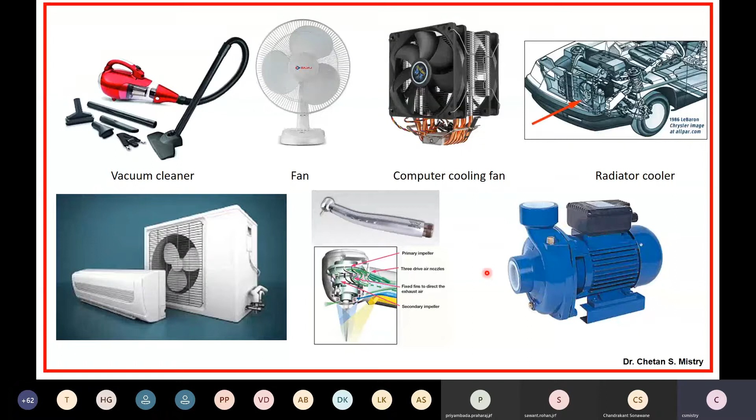Okay, let me move it. Suppose if I am talking in terms of power plants, we have cooling towers. In order to have this cooling, you need to have a big size fan. If you look at that, it's nothing but an application of turbo machines.

If you look at, there are few flow meters known as turbine flow meters, that's what is being used for the measurement of mass flow rate for various liquids as well as gases. You have big size centrifugal compressors, that's having some purpose in terms of transportation, some purpose in terms of high pressure requirement.

We have gas turbine power plants, that's nothing but land based power plants. We have steam turbine power plants, we have hydro turbines. If you start searching for what are the applications of turbo machines, you will find them everywhere. Even if you start with a very small device, that is also made up of turbo machines.

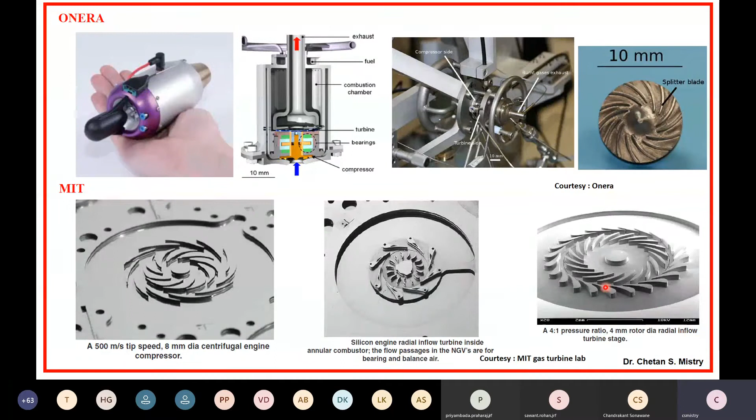People also talk in terms of space applications. There also we have pumps as well as turbines. That's a special application for propulsion, giving very high amount of thrust required for transportation purposes.

We also have renewable sources of energy - tidal turbines, wind turbines. So when you wake up in the morning and start thinking, let me have turbo machines as my device, you will find everywhere all these devices are made up of turbo machines.

Now that's the whole scope of turbo machinery. Let's try to understand what exactly turbo machines are. It is any energy transferred to or from a continuous flowing fluid - that's what is continuously flowing - by the dynamic action of one or more moving blades.

So turbo machines have been classified based on function. Power absorbing device - maybe required for rising of pressure, or rising of head in terms of a pump. So compressors and pumps are power absorbing devices.

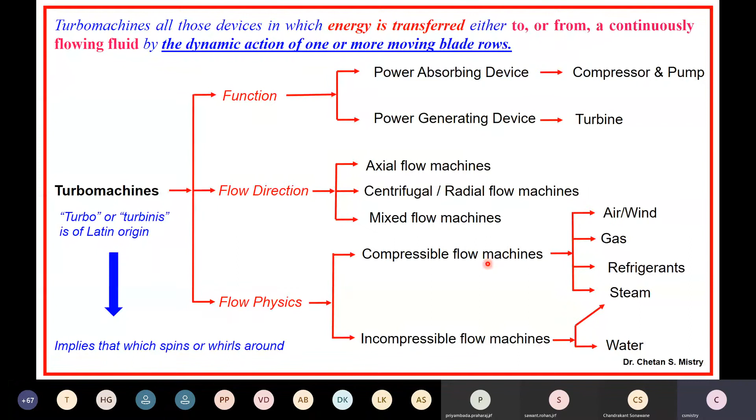Now if I continue talking in terms of turbo machines, it needs days. For the main application of CFD, let me share - in the 70s people started using CFD analysis. They started using CFD for analyzing fluid flow, mainly for aerospace application, mainly for gas turbine engines. Slowly maturity came with the technology, and now people started using this for some other applications too, but CFD in turbo machinery has mainly been applied to aero engines.

So let's see what we understand in terms of engines. We have two kinds of engines - air breathing engine, non-air breathing engine. This classification is very general. I can have jet engine, in which I can have ramjet engine, scramjet engine, pulse jet engine, gas turbine engine, turbo ramjet, rocket jet engine. But major concern is with gas turbine engines.

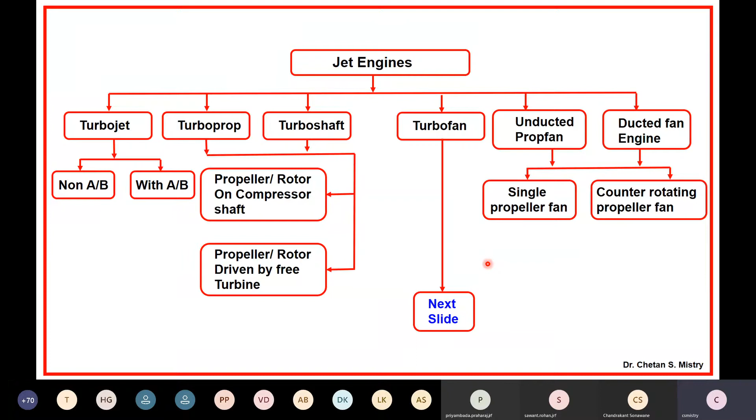So if you look at it, it's again classified - maybe turbojet engine, turboprop engine, turbo shaft engine, maybe turbofan engine. We can have unducted turbofan, ducted turbofan engine. This turbofan engine is further classified into so many things. So you can understand the requirement of gas turbine engines.

And all these devices, if you look at, are prefixed by turbo - meaning it's a turbine or turbo device, used for gas turbine applications. So in my whole presentation, I will try to incorporate maximum devices used for engines, gas turbine engines. I will discuss a few applications for other purposes also, but my major focus will be on these devices.

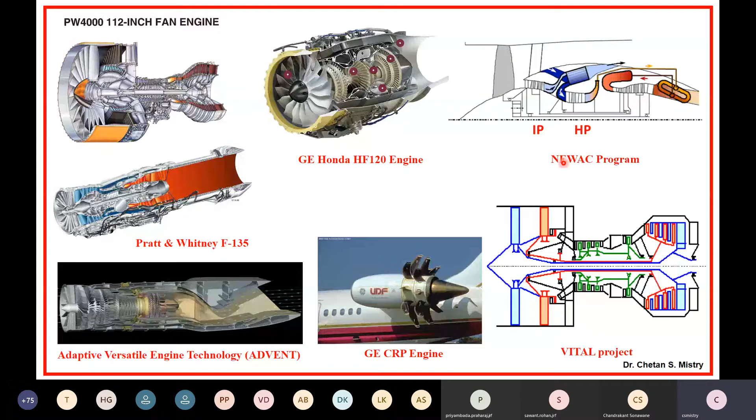Let me start with what I was showing, the high bypass ratio turbofan engine. Here we have a big size fan, which is an axial fan. Here somewhere I have the intermediate pressure compressor. This is the HP compressor, which is run by the HP turbine. So there are two spools placed inside. My HP turbine spool rotates my HP compressor. This is the LP turbine, which rotates my LP compressor.

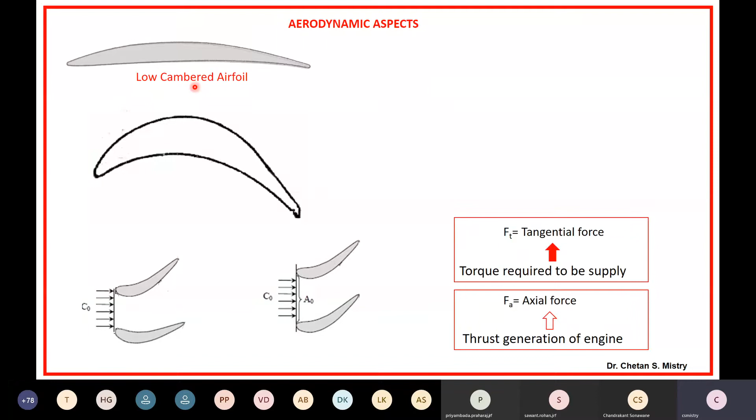So as I told, we are having an aerodynamic device, that aerodynamic device I can say is an aerofoil. So here if you look, this is what we say as a low cambered aerofoil, because my turning or bending, this delta beta, is low. If you look at the second one, that's what is called a highly cambered aerofoil. Now these two both have special application.

What is the purpose of my aerofoil? It is to generate the lift. If you ask any aerodynamicist, if you ask someone who is working in fluid mechanics, he will say the whole purpose of this is to generate the lift. Now, when I say it is to generate the lift, then you will say, sir, then why are we using this in turbo machines? We need to take benefit of this lift.

So I say, if I look at this aerofoil, that's what is generating lift as well as drag. So lift is of my requirement.

Here if you look, I'm having a passage, one of the cut sections in which my inlet area is lower, my outlet area is greater. Same way, other configuration, if you are looking, I'm having my inlet area to be higher, my exit area to be lower. So we can say this passage is called a diffusing passage, and this one, which looks like a nozzle, is called a converging passage. Now this is what we say is one of the devices.

Here we have the direction of rotation for both compressor and turbine. My compressor blade rotates, and this upper surface is what we call the suction surface, while this lower surface is the pressure surface. So this is my suction surface, this is my pressure surface.

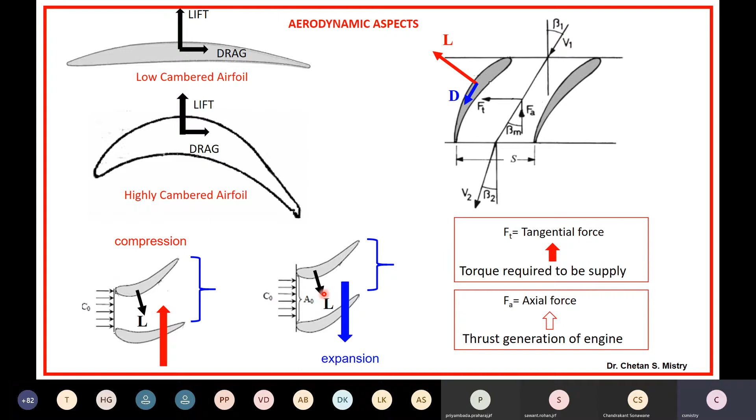Similarly, for expansion or turbine, I am also having my lifting force. Here I am utilizing this lifting force to accelerate my flow, which is my requirement for the turbine. So this is the whole purpose of what we call aerofoils.

Now let's try to understand what is happening, and what is the purpose of an aerofoil. The purpose of the aerofoil is to generate lift, and we use that lift force for compressing our air or gas. So here I have my suction surface and my pressure surface.

This represents my velocity distribution on the pressure and suction surfaces. On the suction surface, initially the flow accelerates, and then it gets decelerated. Similarly, near the pressure surface, the flow accelerates up to a certain distance, and then it gets decelerated. This represents the distribution of velocity change along the chord.

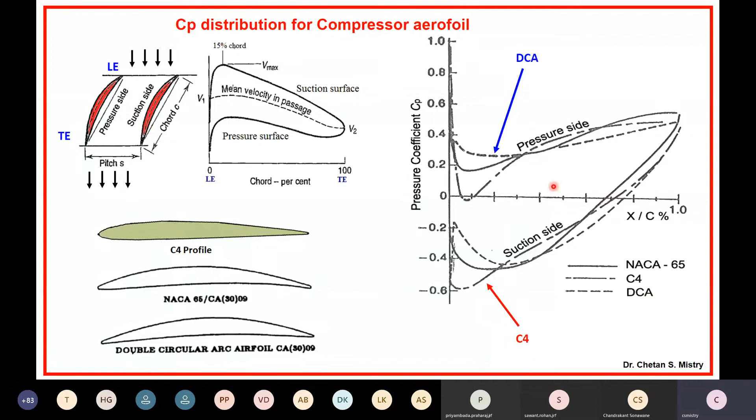Now let's look at what is happening with the aerofoil. I won't spend much time on the velocity triangle, but let me say this is the blade angle beta 1. My flow is entering axially, and this is my rotational direction, so that represents my beta 1.

Same way, this is the exit of my rotor, coming out with blade angle beta 2, and this is my stator. So this is my velocity triangle at some location. Now with change of mass flow rate - which is nothing but density into area into velocity...

You need to understand, if I'm reducing my mass flow rate, and my density is not changing and my area within the passage is constant, then my axial velocity is decreasing. My rotational speed is same, so my beta angle will be changed. Reverse case, if I'm increasing my mass flow rate, my axial velocity is increasing, so my beta angle will be changing. In terms, this is called incidence increase and incidence decrease. Similarly, at the exit, that angle is deviation increase and deviation decrease.

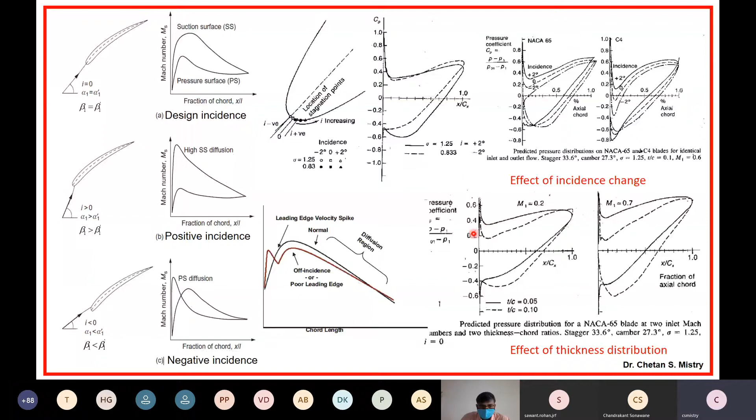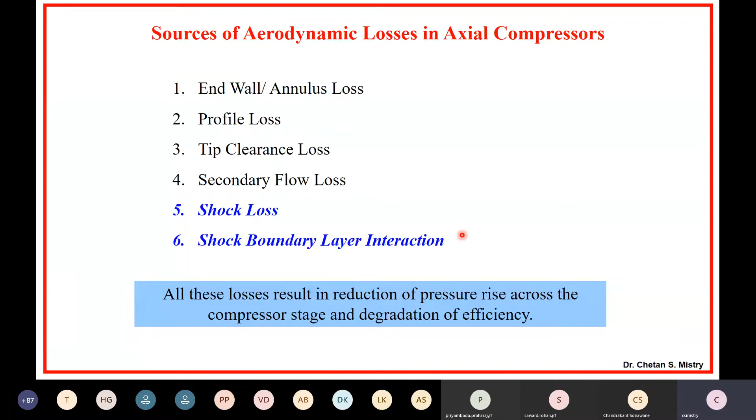Suppose if I say in terms of end wall losses, what we know is whenever I have a solid body and fluid is flowing over it, because of viscous effect, we will be having growth of boundary layer. If you consider a compressor as a device, that's enclosed inside the casing, and casing is a solid body, so along the length, my boundary layer will be growing downstream. Same way, if I consider my blade, that blade is also a solid body, so it will be subjected to growth of boundary layer because of viscous effect.

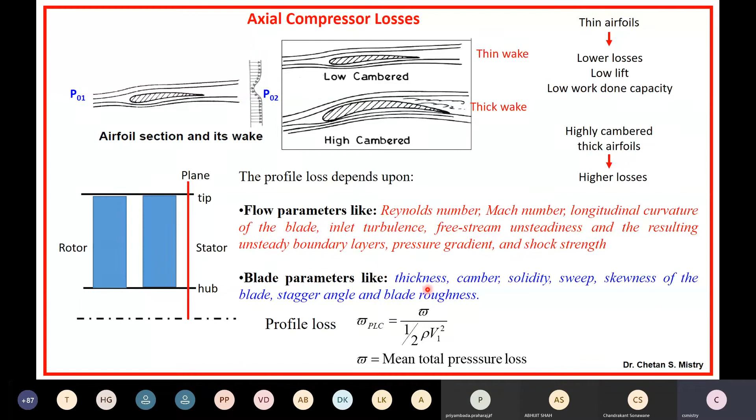Let's move towards the next topic. Now, suppose this is my casing and this is my rotor. My rotor needs to rotate freely, so I need to provide a certain amount of clearance between casing and rotor. If there's a stator, that can be connected from hub to the casing, but I still need to have a certain amount of clearance.

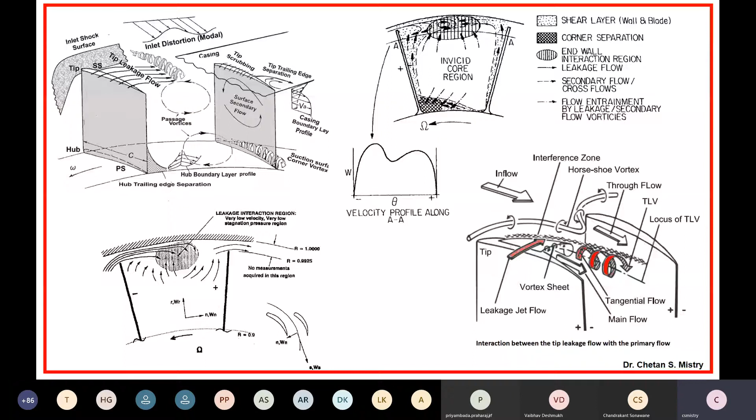If I'm moving away from design condition, say positive incidence or negative incidence, you need to understand that's related with the change of mass flow rate.

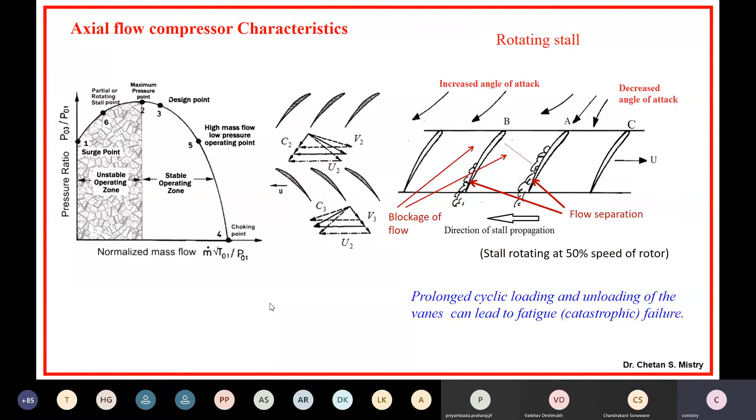As I told, when I'm moving towards the low mass flow rate side, what happens? My incidence angle changes, and I'll have separation of flow on the suction surface. This will try to change the angle of attack for the next coming blade, because of my rotational direction, and that blade will change with decrease of angle of attack. At a particular time I'll have loading and unloading of my aerofoil, or loading and unloading of my blade. If that's the situation, I'll have repetitive change, and if that continues, my blade may fail because of fatigue, since it's a cyclic loading.

Now let's see, this is what I want to show. This is one of the critical problems when we talk about compressors - it's called compressor stall.

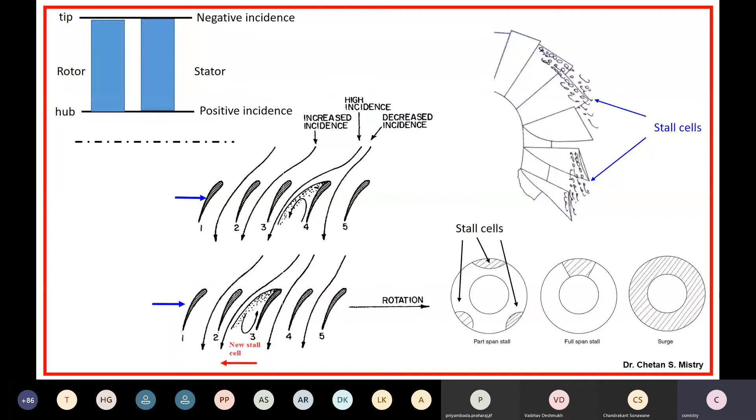Suppose this is my rotor and this is my stator. When my mass flow rate is changing, there may be a possibility that in this tip region my flow will get separated like this. When it separates, that's what makes small kind of stall cells. Let me show you - this is what makes the stall cells. Now what happens? This is nothing but low momentum fluid pockets, dead pockets that move towards the next stage of my compressor. Then it may happen that it's subjected to form a full stall. Again, that's moving downside, and it will occupy the whole passage with this low momentum fluid - that's what we name as surge.

Okay, so let me move next. Here, this is what is your case.

Suppose, say, if I consider... Dr. Mistry sir, yeah, can you please use that pointer again? Yeah, thank you.

Now when there is a disturbance of low intensity, I'll be having this kind of pockets. When you are flying in an aircraft, the pilot often announces there is turbulence, so tie up your seat belt. What this turbulence means is that the intensity of the air going inside is changing rapidly. That is the kind of pocket we are talking about.

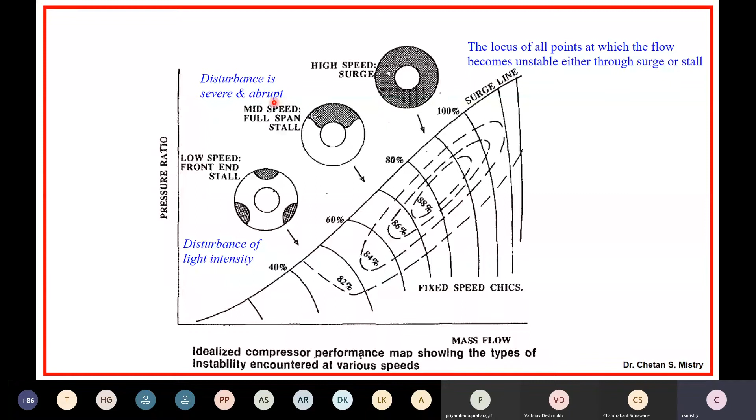In a particular region I'll have high mass flow rate, in another region low mass flow rate. These combine together and somewhere make a big size pocket, and that is severe and abrupt. What will happen is that your whole aircraft will feel heavy vibration, and sometimes your whole compressor will go under surge.

Surge means when the engine is running under good condition, high pressure and high temperature air enters the combustion chamber. Because of disturbance inside the flow, it may cause blockage of the flow at the exit of the compressor. Now upstream, at the combustion chamber, I have high pressure and high temperature air, and here I have low pressure air.

So now the air will try to move in the backward direction, from the combustion chamber towards the front side it will come out. Many accidents have happened because of this.

So whenever people are doing design, they always take care in terms of what we are talking about for stall, or surge. This is a very critical, very serious, very typical situation that happens when your engine is flying. So if you ask what is the heart of an aircraft, I say the heart of my aircraft is the aero engine.

You may be a very good aerodynamicist, a very good structural engineer, very good in terms of controls, but until your heart pumps, it is of no use. Inside the engine also, if your compressor is not working fine, your whole engine is of no use. There were many accidents in the past that happened because of this surging.

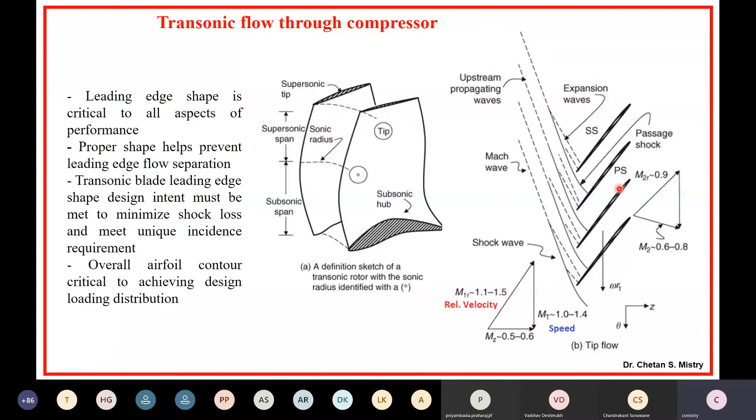What will happen in this situation? The flow near this region will be transonic. This represents the upstream propagation of Mach waves or shock waves, and I'll be having expansion fans. This puts an additional challenge in the design of compressors. Let's try to understand this, if you recall, I was talking to you in terms of aerofoils.

You need to understand when my flow is transonic, I cannot use the conventional aerofoil or C4 aerofoil. What is the reason? Let's understand. Suppose my inlet Mach number is more than 1.4. Then there will be a shock standing in front of my blade. If my blade is blunt, circular, or elliptical, it will give you

a bow shock, which is not desirable. When my flow is supersonic, the blade's leading edge needs to be sharp, so that my shock stands at that point. Now going downside, I'll be having expansion fans because my flow or the surface is turning.

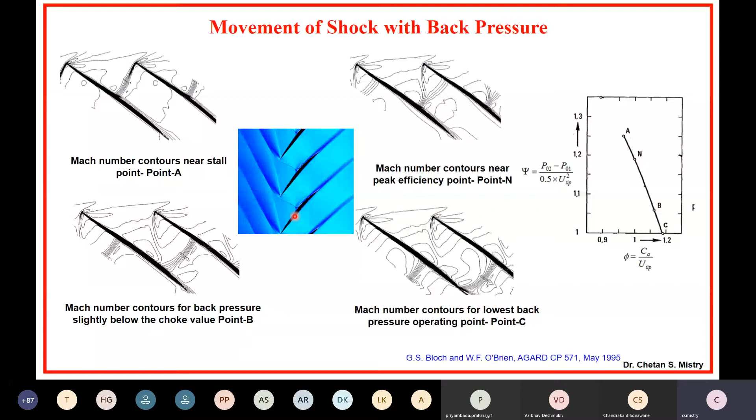Now if you look at these contours, what they represent - you should not forget, though you are having shocks, your blade surface is a solid body, so there will always be chances of growth of boundary layer. So in this particular region, I'll be having interaction of shock and boundary layer. People working in compressible fluid flow can understand how difficult it is to analyze this flow physics. This is one of the challenges to capture this kind of situation.

Now let's move to the next component, which is nothing but my turbine. Compressor, as we discussed, the purpose is to compress the air. The purpose here for the turbine is to accelerate my flow. Now when I say I want to accelerate my flow, what combination will I be having?

I'll be having a stator - sometimes people write that as a nozzle guide vane - and I'll be having a rotor. So I'm having stator and rotor. Whatever flow comes out from my combustion chamber will be striking on this nozzle.

Now the nozzle - my inlet area and my exit area are different - so what it will do is accelerate my flow. That accelerated flow will be striking on my rotor blade, and because of that, my blade will start rotating from pressure side to the suction side. You need to understand we are talking in terms of using the benefit of your lift force. So this is one of the configurations.

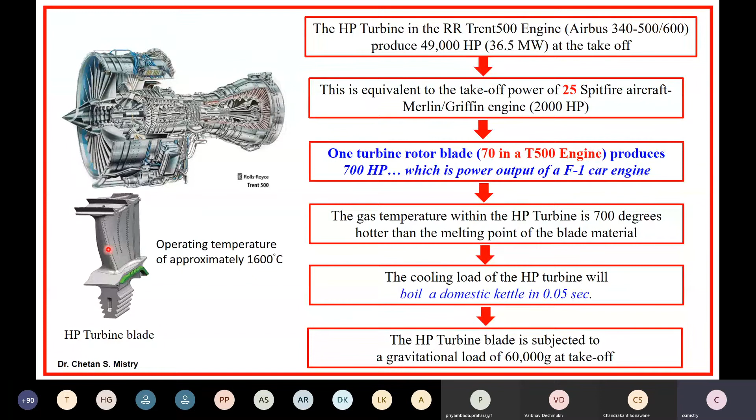Now when I say cooling, you need to understand, the question needs to start in your mind: do I need to use my CFD analysis for designing this cooling blade, or to design the blades for this cooling? We will see this.

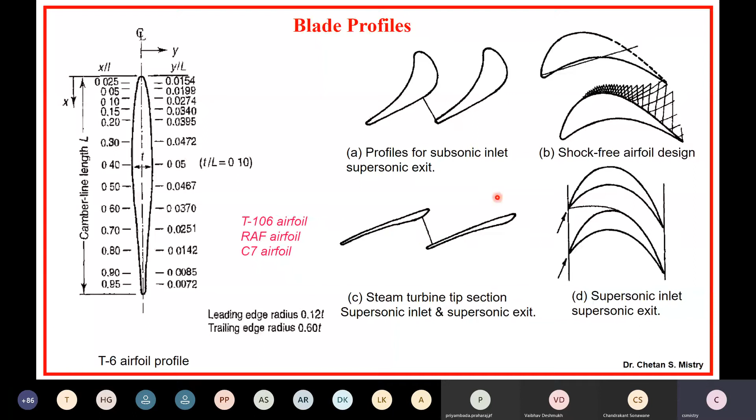Now there's one more trend going on for the last 10 years. What was the earlier case? People used experimental results. NASA has very good wind tunnel and cascade tunnel facilities, so based on that they made a whole lot of aerofoils and have the data, including CP distribution. Based on the requirement, they collect those aerofoils and put that aerofoil as per their requirement.

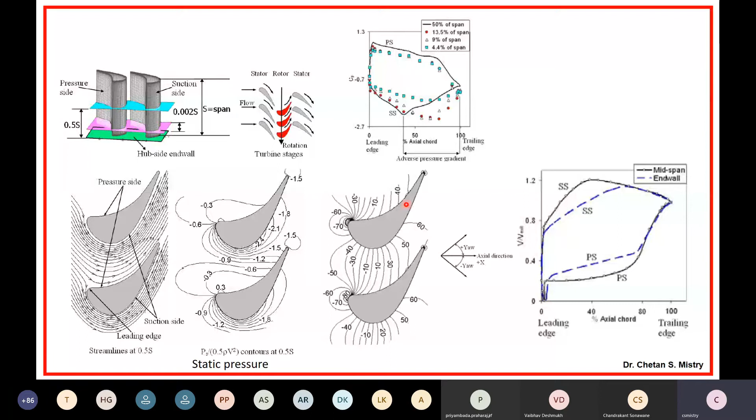Now in terms of losses for the turbine passage, let me move here. I'll be having different kinds of losses. Let me go to the next slide, which shows the flow passage between your turbine blades.

Here you need to understand, as I told, I'll have a blunt leading edge present here. For my compressor aerofoil, I need some acceleration of flow followed by deceleration. But in the case of turbine, I'm looking for whole acceleration, which needs to happen on my suction surface. So this is the curvature for me.

Now this is a solid body. This blade is placed on my hub where I'll have a solid body. This blade itself is a solid body.

So what will happen, I'll be having my growth of boundary layer all the way from inlet towards the blade. That's what is representing my growth of boundary layer. When it is coming in contact with this, it is making this kind of point, what we say as a saddle point. So this is also one kind of fluid mechanics.

Maybe people are not teaching this in the courses. When you are studying or reading CFD analysis, I used to say number of times to my students, even my end users, that you need to understand the flow physics. And in order to understand the flow physics, you need very good understanding in terms of post-processing, what all you need to post-process or plot.

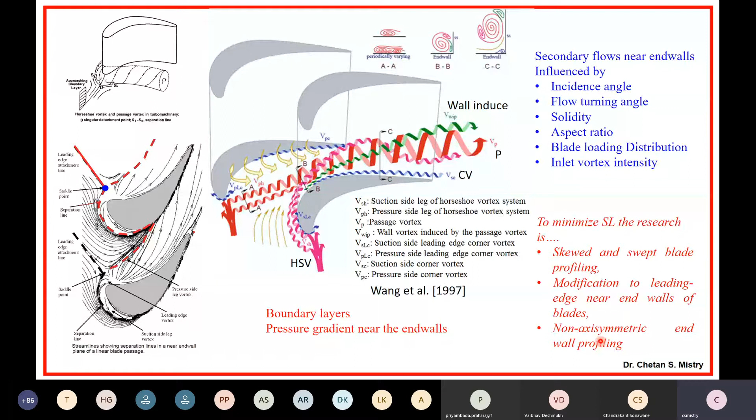Now all these things are influenced by other parameters also. It is not like a single condition. It's affected by your incidence angle, flow turning angle, solidity, aspect ratio, blade loading, inlet vortex intensity. All this together, your whole physics becomes more complex.

Here also, you need to maintain a certain amount of tip clearance. In a turbine, because it is subjected to high temperature, I'll be having thermal expansion of the blade as well as the casing. If I don't give sufficient clearance, it's possible that my blade will get stuck with the casing and stop rotation of my wheel, and that's a gone case. So the mechanical requirement is you must have clearance in between the casing as well as the rotor.

One more thing: in the earlier case, for the compressor, my flow rotation was from suction side to pressure side, and my leakage flow jump was from pressure side to suction side, so I was having a cross flow kind of configuration. Now in this case, my flow is jumping from pressure side to suction side, and my rotation is also from pressure side to suction side. That's what makes the flow complex in the tip region. There will be a separation bubble near the pressure surface, giving a jet kind of effect, decreasing somewhere, and mixing, which gives you the tip leakage vortex.

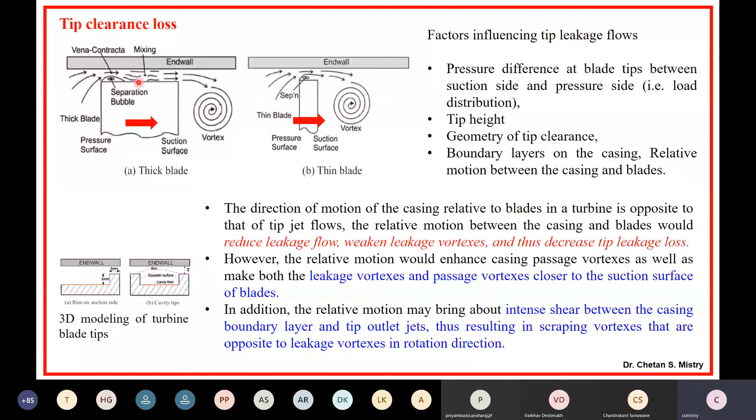Because this blade is a taller blade, I'll be having secondary flow that extends up to 30% of my hub and 30% of my shroud.

Now, when talking in terms of turbomachinery flow, the complexity is because of secondary flow caused by viscosity and complex geometry. You'll have passage vortex, leakage vortex, corner vortex, trailing edge vortex, horseshoe vortex, scraping vortex, all together along with rotation, making the flow very complex. At the same time, your rotor is rotating and your stator is stationary, which gives unsteadiness in the flow, making the case even worse. The pattern near the wall region - laminar flow, transition flow or turbulent flow - along with separated flow, creates more trouble. And the problem doesn't end there: my flow can be incompressible, subsonic, transonic or supersonic, which puts additional complexity.

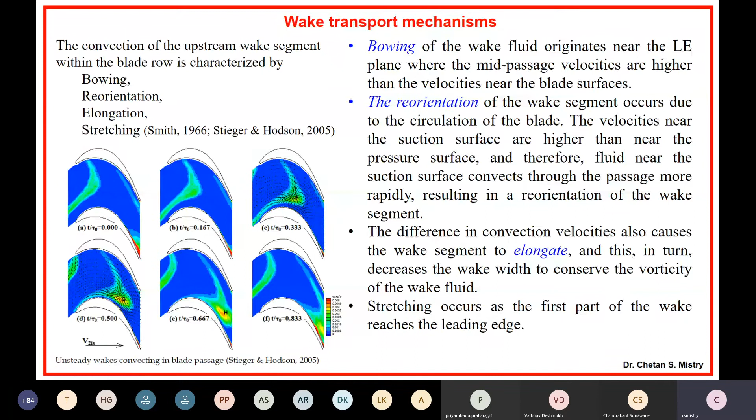Let me look at the time. If Professor Sonawane agrees, we can have a break of 15 minutes - for water and tea. Is that okay?

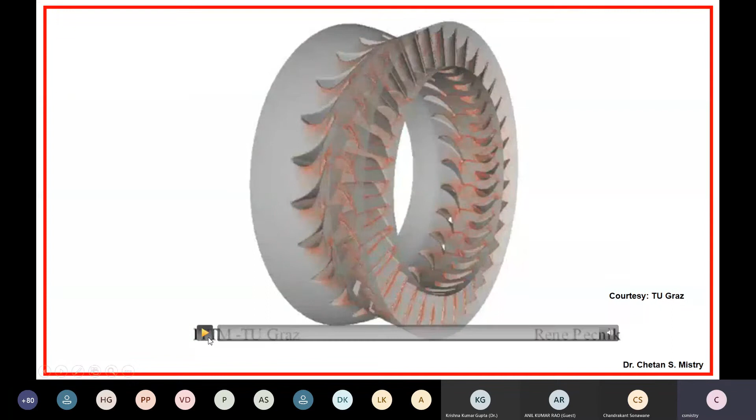This is one of the animation videos we got from TU Graz, which discusses what we were talking about in terms of complexity of flow physics. Just have a look. This is a transient 3D Navier-Stokes equation solver, along with some of their experimentation with PIV and LDV.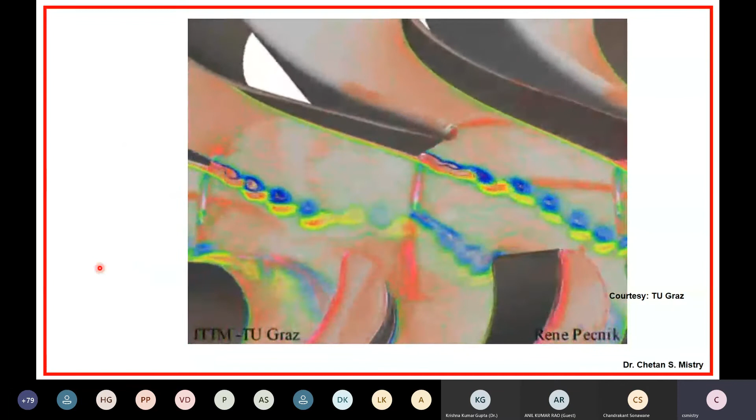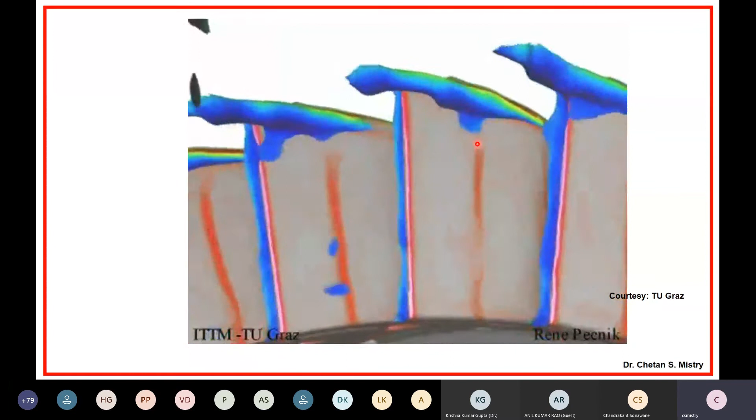Just look at the midsection. These are the vorticities that are present. You can see how the vortices are moving in between the passage. This represents what we were discussing in terms of tip clearance flow from the rotor part, and in between the passage also we can see these flow structures which are moving within the passage.

Professor, are these the velocity distributions? Yes, so this is mainly an iso surface representing entropy, which in a sense indicates losses. This is the stator, rotor, and stator combination, and this is representing entropy.

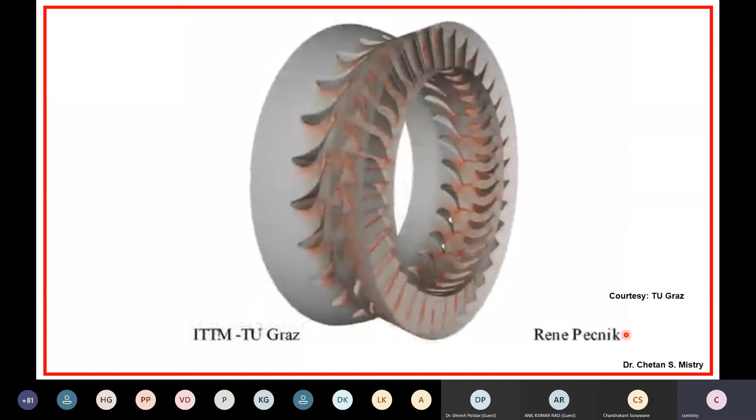So this is what all we are looking for, in a sense. This is for one stage, and we have 4 or 5 such stages for a turbine, and maybe 10 or 12 stages for a compressor. This is the requirement when we talk in terms of aero engine application.

So this was showing all the complexity we are having. It says unsteadiness is mainly present when we talk about turbine or compressor, potential interaction, vorticity, shock wave interaction, hot streaks. When we talk about the inlet at the nozzle, exit of the nozzle, and entry of the rotor, you have high temperature gas flowing with uneven distribution of temperature.

It may be non-deterministic, which we cannot predict or find with our conventional methods. There's tip leakage flow, shroud flow, coolant injection, shear layer flow, wake and secondary vortices, turbulence where we have no idea of the turbulence intensity, and growth of boundary layer. All these things make the flow through turbomachines, compressors or turbines, very complex in terms of flow physics.

Now, this is what we were discussing. Then what are the challenges? When we talk in terms of CFD, the very first thing to understand is CFD is not colorful display, it's computational fluid dynamics. We need to solve particular equations: mass conservation, momentum conservation, energy conservation, ideal gas equation, maybe species, all those things, and solve those equations in small volumes.

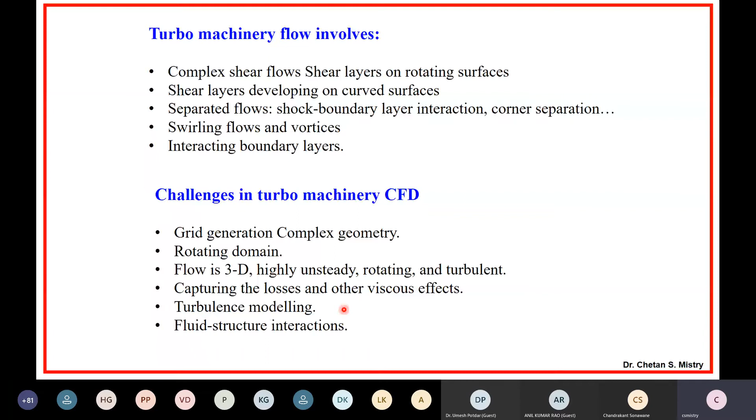So the challenges include grid generation for complex geometry, rotating domains, flow that is highly unsteady, rotating, turbulent, capturing of losses and other viscous effects, turbulence modeling, fluid structure interaction - all these are major challenges in turbomachinery CFD. The main challenge is with the aerofoil section.

That's what we are using for compressor as well as turbine. You can see all these are the unsolved problems with us when I'm talking only in terms of aerofoils. So this aerofoil that will be subjected to all this kind of complexity, and that's what is making my flow physics very typical, very difficult.

And that's what we are expected to do using computational fluid dynamics. Now let's move. This is representing the growth of efficiency in terms of, say, SNECMA. Initially they were using potential flow theory, then slowly moved towards 3D Euler, Navier-Stokes equation. Over the years they have increased their efficiency.

Now if you look at these, these are the generations of your Rolls Royce engine fan blades. Just look, earlier it was having shrouded blade. Now it is a wide chord blade. Just look, now this engine is having reduced the number of blades. Let me share, this blade has a height of around 5 to 6 feet, and one blade costs in terms of lakhs of rupees, and it's made up of composite material.

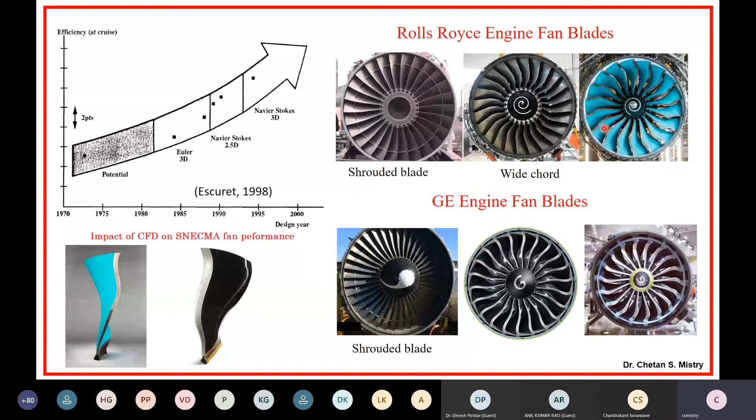So initially you will be given some mission, a specific aircraft application, maybe military aircraft, maybe commercial aircraft. You need to do your cycle analysis, determine or select different parameters, then check their performance based on number of components, check with the weight, do scaling, check with different component design. So that's where we are using our tool, named as CFD.

And finally it will go for manufacturing process, and then it will go for testing, and once testing is done, then that's what will be used or put into use. It's not like one engine you are making and once that engine gets certified, all engines will go through. All engines need to be certified.

Let me share the experience with the Indigo part we were looking at. If you read carefully, for last few years, starting from January to March, what was happening for Indigo aircraft is when they are taking off, after certain time or after certain flight, they are coming back and saying the engine is having trouble. Now, when we say engine is having trouble, you need to understand there is something wrong that was done by the engineers and mainly the designers.

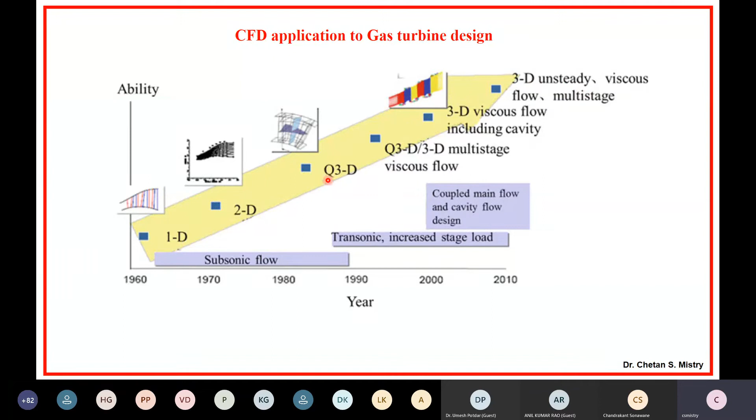This is the growth of development of CFD for gas turbine engine applications. These are some of the lines - that's the database with the engine manufacturing company. They have all these kinds of tools. It's not like a single person is working and suggesting something that gets accepted. They already have a whole lot of data available with them. They have their in-house tools. They don't use commercial packages because they need to design, analyze, and with that analysis develop a testing rotor or testing stator. Then they need to go for testing. Once it's working fine, it's okay. If it's not meeting requirements, they again need to go for modification in the design, and that's all possible with this database.

When we talk about various CFD analysis, we can have potential flow solution - it's the easiest way. We can have 2D Navier-Stokes solution, 3D Navier-Stokes equation, RANS, and unsteady RANS.

Let me share with you the case for RANS. What we are doing is using a truncated form of the Navier-Stokes equation with certain approximations. So when we say we have certain approximations, that means there's a constraint, a limitation. People started talking about using LES. Now people started talking about DNS. When we say DNS, that's solving the original form of the Navier-Stokes equation - it does not require turbulence modeling, and that gives a more accurate solution.

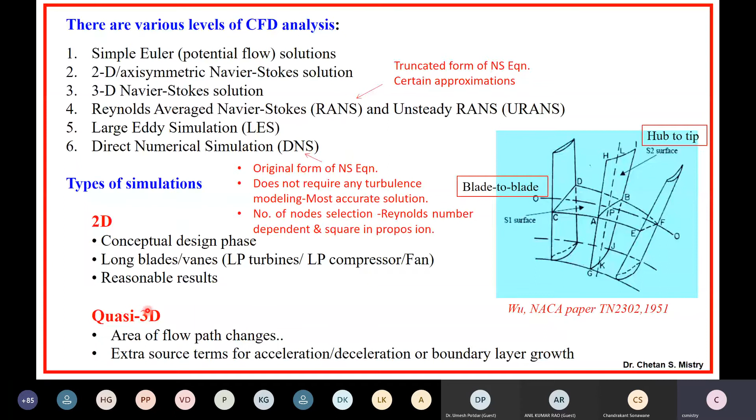The approaches are 2D, quasi-3D, and 3D. 3D - that means what we are doing at this moment, that's called 3D.

Now the analysis types are stationary analysis and transient analysis. Stationary analysis is most common and people use it for initial designing. When we talk about analyzing the developed component, then we need to go with transient analysis - that gives minute details of the whole flow physics and gives the opportunity to modify the design as per requirement. So this is the recent trend - 3D, transient and stationary kinds of analysis.

As I told you, we need to go with the basic governing equations. Your CFD needs to solve conservation of momentum, energy conservation, equation of state. If you have reacting flow, then you need to go with species conservation.

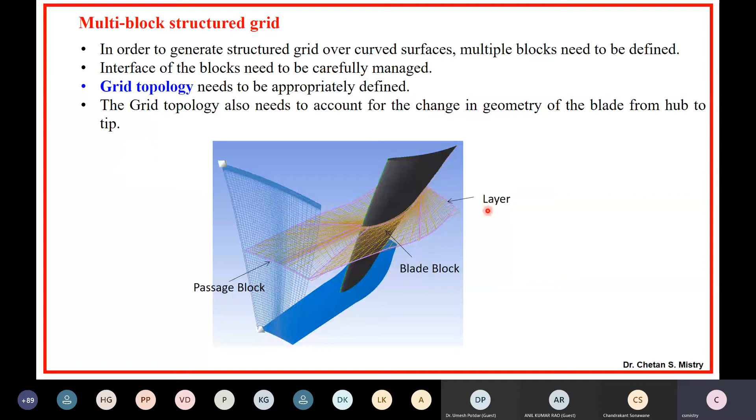Now suppose this is my leading edge. I know at the leading edge my blade angle or flow angle is changing, so I need to capture that in detail. Similarly, at the trailing edge, I need to capture the wake that's coming out. So for that purpose, there are certain topologies we need to use. That topology is nothing but representing your passage block or blade blocks. Let me move here.

We are having different kinds of meshing. I can use an O-grid - around the blade I need to capture the growth of the boundary layer, and for that I need to take care of my Y plus value. Since this is an advanced course, I'll not be spending time here discussing Y plus. You can understand. Now, I'll be having the curvature of the blade near the leading edge and trailing edge, where I'll be using a J-grid kind of thing. And in the remaining passage, wherever I'm having that passage, I'm writing it as an H-grid.

If I'm talking in terms of upstream and downstream conditions, if they are not the same, then we can use L grid or C grid kind of approach. The flow physics you need to capture around the blade, near the leading edge, near the trailing edge, and in between the passage, that's what will decide exactly what you need to use.

Many times people ask what results you are presenting. They will ask, have you done a grid independent study? Or is it grid insensitive results? Because with a coarse grid or fine grid, your result may vary.

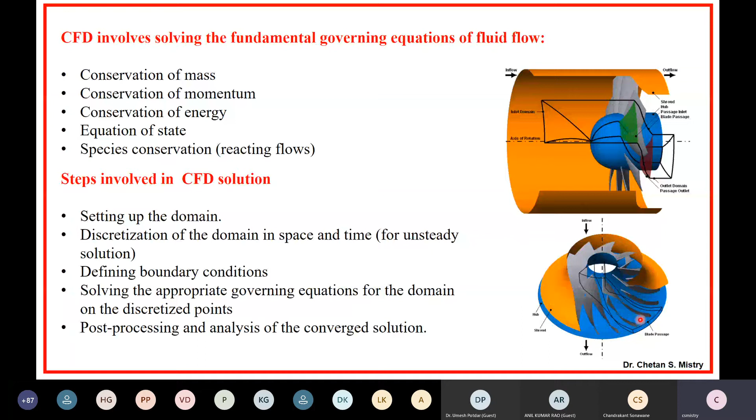Similarly, for a centrifugal compressor, this is my blade, a single blade, since it has a splitter blade, I'm selecting two blades, inlet, outlet, and I'll have a periodic surface. Let's move to that slide. This is my inlet, outlet, and this represents my periodic surface.

The upper side is what people call shroud or casing, and where the blades are installed on the surface or disc, that's called the hub. Similarly, this is for a radial machine.

Now, a very important case is what boundary conditions to use. Depending on the application, you need to decide whether your flow through that passage is compressible or incompressible. I can use total pressure, total temperature, velocity profile, that's very common. There are other boundary conditions like velocity inlet, mass flow inlet, but they are not much common, they have certain limitations. So the most common idea is to use a total pressure inlet condition, or if you have experimental results where you've measured velocity throughout your blade, you can put that as your boundary condition.

Now in terms of exit condition, static pressure is what people conventionally put. Many times people also use mass flow outlet condition. When analyzing a compressor, you need to capture certain flow physics, and detailed study based on experience recommends that it's preferred to use static pressure outlet boundary condition, which gives better results for compressible flow.

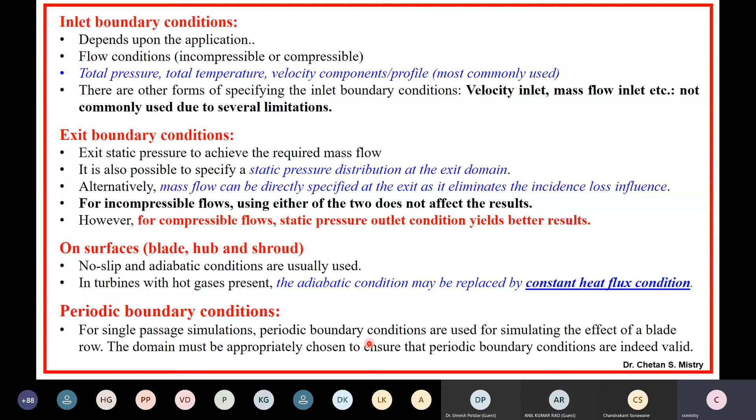Now periodicity, what I was talking about, is based on the blade we are using. So I can say half the pitch on my suction side, half the pitch on my pressure side, that's what we consider as the domain.

Now what we know, my rotor, that's what is rotating. Physically we need to understand what I want to analyze. Say I want to analyze a stage, that's what is comprising of rotor and stator. When I say rotor, it is rotating. When I say stator, it is a stationary part. So what I need to do, I need to connect the stator and rotor.

When I say I want to connect one mesh, that needs to be a rotating mesh, and the other mesh is a stationary mesh. So I need to connect these two. When I'm talking in terms of experiment, if you ask me what detail I have in terms of CFD, I say I have limited because I'm an experimentalist. I'm more interested in doing the experiments, but I'll still be using this CFD. So what I need to do is put the interface between the stator and rotor. Let's see what that is.

So here if you look, this is my one fluid domain, this is my other fluid domain, and in between, this is what is called the interface. And for that interface we have different approaches. One approach is called the mixing plane approach.

So what this mixing plane approach is doing is averaging in the circumferential plane. So here in this plane, they are doing circumferential averaging, and a uniform flow is what will be going downstream. Okay, so this is the mixing plane approach. It does circumferential averaging both near the inlet and at the outlet domain, and thereafter at the exit it gives a uniform flow.

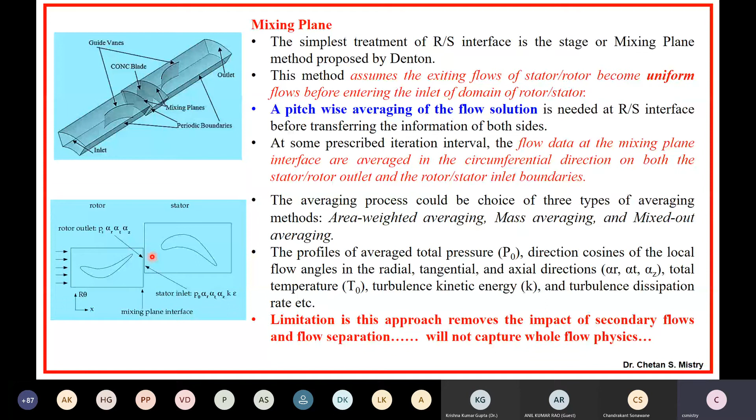The second option people adopted is that you should not have averaging at the plane. That's called the frozen rotor approach. Whatever data is coming out from your rotor or stator, the same data needs to be transferred downstream, and that's called the frozen rotor approach.

But in this case you need to be careful. Say when I have 20 rotors and 20 stators, then 1-to-1 matching in terms of pitch is possible. I'll show that in the next slide. But if I know my number of stators and rotors are different, then you need to check with the motion of your stator and rotor, and then capture the physics.

Let me show you. This is work by one of my PhD students. Here if you look, we are having a tandem bladed rotor. This is my stator. What is happening, if you look, is it does averaging at this plane, and that average flow value gets transferred. So the physics, the wake that is moving here, is not being captured.

Similarly here, this represents the effect of your rotor wake, you can see what we have. Now as I told you, you need to be a little careful. Just look, you are having some kind of discontinuity in that sense. This is because of what we call pitch position, so that's called the clocking effect. You need to be a little careful in capturing this physics, so you need to account for the clocking effect and play with shifting the angular position of maybe the rotor or maybe the stator.

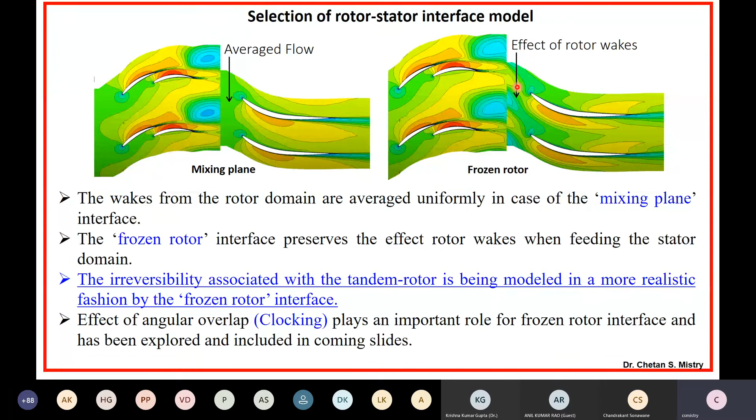Now let's move to the next question, which is about the selection of your turbulence model. There are different models available, but there is no fixed model that we can say works for all kinds of simulations.

People used to use the Baldwin-Lomax model. Sometimes people used the one equation model, the Spalart-Allmaras model. They are very good in terms of capturing the physics, but sometimes they give unphysical results, and that's the reason why this has not been accepted. It is not exactly capturing the physics in terms of separating flow, rotating flow, or flow with strong effects of secondary flow. That's what we cannot do using this kind of turbulence model.

That means we now need a strong turbulence model that can capture the whole physics. Otherwise it is no use. Why are we doing our CFD analysis? If we cannot capture the physics, it is of no use.

For that purpose, people started using the K-epsilon model and the K-omega model. With the K-epsilon model, it over-predicts your turbulence flow, and that's the reason why when we have acceleration and deceleration of flow near the leading edge or around a shock, that cannot be clearly captured when using the K-epsilon model. Conventionally, if you ask someone what is its use, they say it's for analyzing free stream or unconstrained flow conditions. Here, in this case, my flow is constrained between the passage, which means I cannot straightaway use this K-epsilon model.

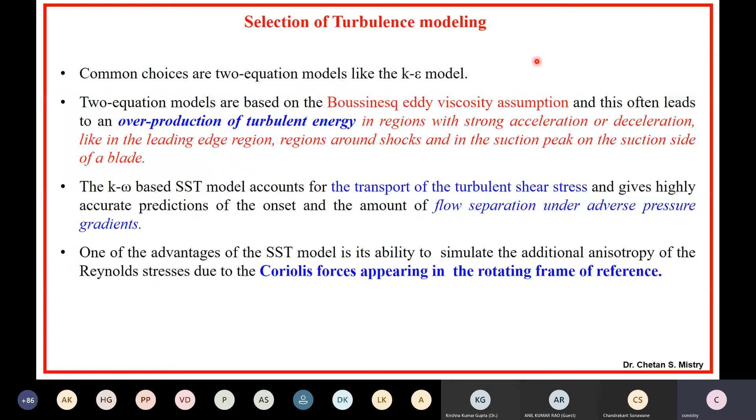Now, in terms of our requirement for selection of a solver, what we want to capture are different fluid flow properties. In order to calculate that, we need to solve the Navier-Stokes equation. There are flow non-linearities, which we define as the convective term, and these convective terms are because of turbulence or density variation, since we have shock waves. So in terms of solvers, we know we have two kinds.

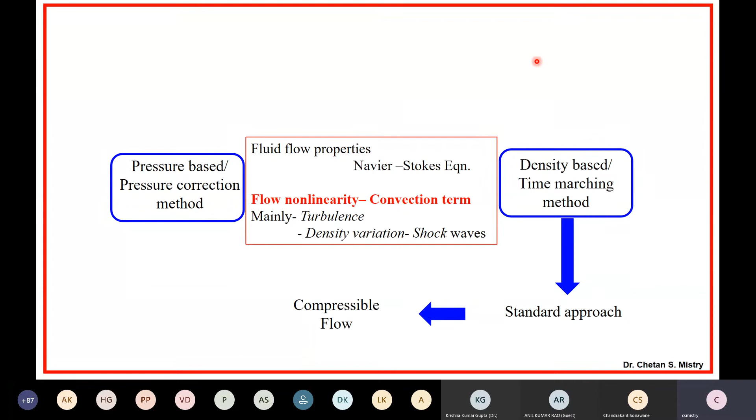One is a pressure-based solver, or pressure correction method. Second is a density-based solver, or time marching method. Conventionally, we use the density-based solver as the standard approach for compressible flow, and the pressure-based one for incompressible flow. But still, people say they want to use the density-based solver for incompressible flow — yes, that is also possible. What you need to do is make the time derivative of density in your continuity equation disappear, and you need a preconditioning method to solve your compressible or density-based code for incompressible flow.

Similarly, for pressure-based solvers, you need a compressibility extension to be adopted. Even in commercial packages, people say they use Fluent for their solver, or ANSYS, or Star-CCM. There are many solvers available, what we call software. So you need to be very careful about what kind of software you use for what kind of flow physics.

Over the years, with the maturity of technology and a strong database of experimental results, companies now have their own codes, because they have understood what kind of flow physics they are looking for and what kind of flow will be there between the blade passage. So all of this that we are talking about has grown over the years.

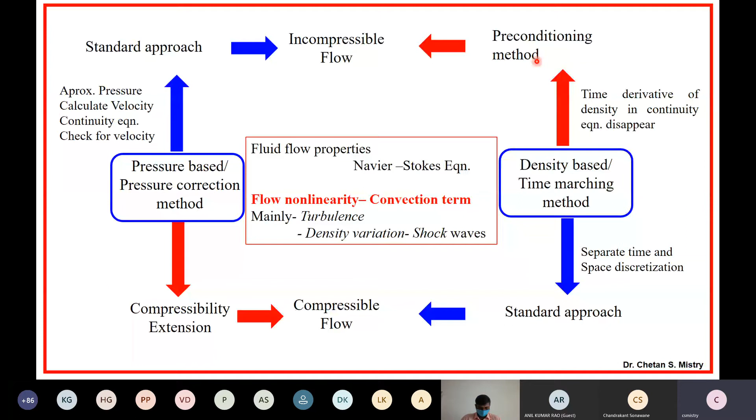Now, in terms of convergence criteria, we used to say my solution needs to converge. So what we are doing is putting some observation parameter and finding the residuals, and based on that we are saying your results are converged.

But there are different possibilities, say without resolve wall condition or with resolve wall condition. You need to take different approaches, and a more complex situation happens with heat transfer simulations. When simulating heat transfer, my aerodynamic field gets converged, but my thermal field does not. We talk in terms of density, heat transfer, or temperature. Under that condition, you need to stop your run, then check with the parameter. If it is working fine, it's okay.

A well resolved wall with heat transfer can take sometimes 10 times longer for the thermal field to get converged. When talking about applications like turbines, you can understand the complexity. We are talking of an aerofoil, which has aerodynamic property. We are talking of hot gas, which has thermal property. We are talking of cooling, with cool air. So that's a big issue.

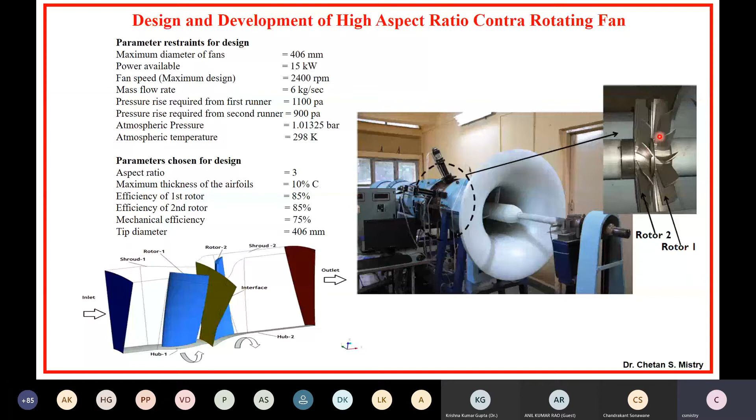Okay, so in order to analyze that, this is how we have done the analysis. My expected pressure rise was 1100 and 900 Pascal. My front rotor is highly loaded, my rear rotor is low loaded. If you look at this, this is the pressure rise we are getting from rotor 1, and this is the pressure rise we are getting from rotor 2.

Okay, so after a number of iterations with flow physics study and CP distribution study, we found we weren't getting the pressure rise we were expecting. So in order to achieve that expectation, this is what we have done.

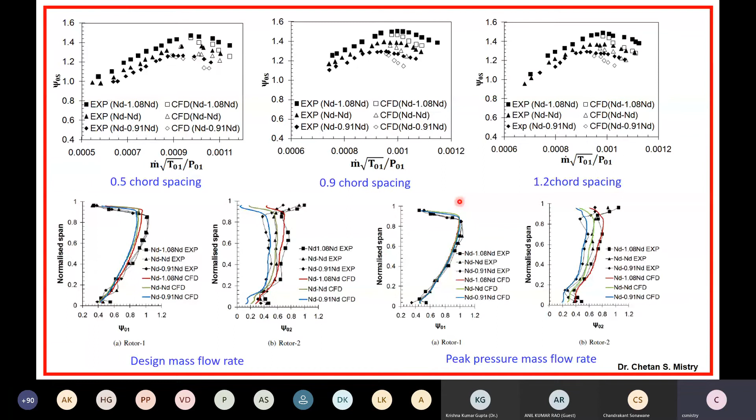Now you need to understand this CFD tool we can use for analysis. You need to be very careful. CFD is not a design tool, CFD is an analysis tool. That technology has not yet developed where you will be having design it will do and analysis also it will do. Some companies are claiming like that, but still it's a question mark.

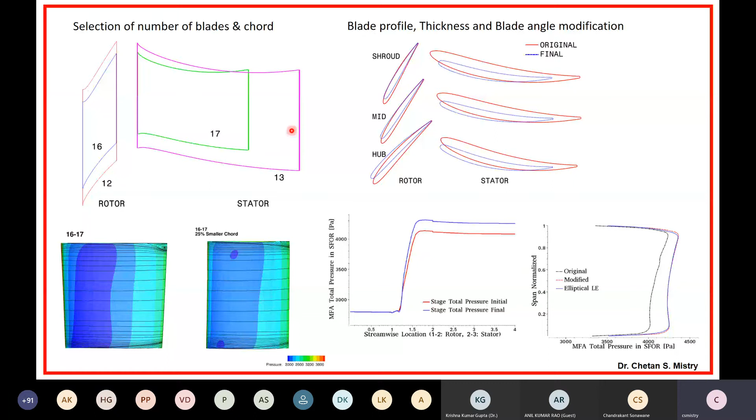So after my joining, this is the first project I have done successfully in terms of design. Now there are few fabricators who have agreed from India. They will be doing their work outside and bring it here, and they will do assembly here with our design.

That's what is happening. But let's discuss in terms of application now. Say for an aero engine, suppose my compressor stage has 12 stage compressor. By some means, if I'll be reducing one of the stages, say in place of 12, I'll reduce to 11, what will happen? My assembly, in the sense the weight of my rotor, weight of my stator, that will be reduced. Same way, length of my shaft also will be reduced. So overall, I'm reducing the weight of my engine. When I reduce the weight of my engine, then overall drag on my aircraft will be reduced. That means it will improve my fuel economy.

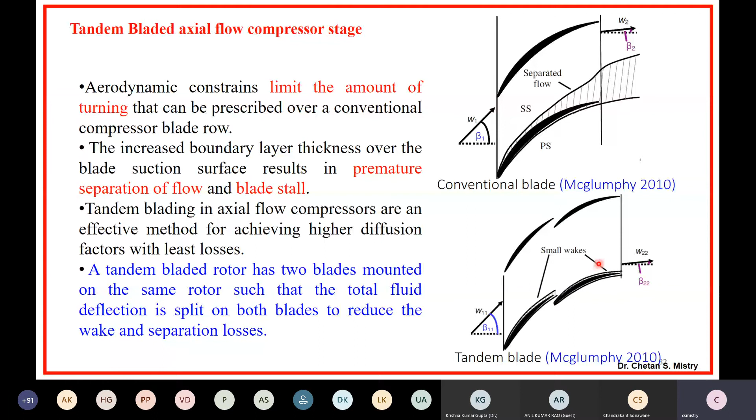So what is happening with my flow, that's what is coming here. Since this is having low turning, the chances for my flow separation are less. Now in between this passage, you can see this is having a nozzle shape. So what it will do is accelerate my flow on this second blade, and that's how it is delaying the separation of my flow on this surface. So that's the whole physics here.

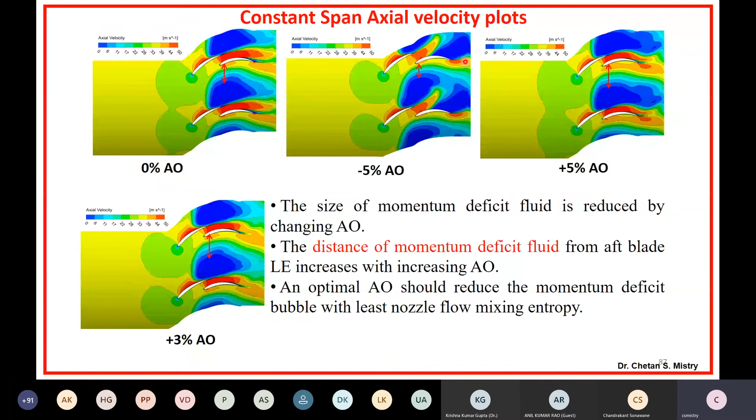Just look at what is happening near the trailing edge of my rotor 1. Then what is happening with my rotor 2? Here in this case, here in this case, here in this case, here in this case. So now at the exit, my flow will be coming out with this kind of vortex. This is what is called a combined vortex, that's coming out from my passage.

And here if you look at, this is because of my nozzle effect—I'll be having acceleration of flow.

Now I was discussing that because of tip leakage flow, I'll be having this low momentum fluid present, and that will impact my stator. So we have analyzed this rotor separately and found it is working fine.

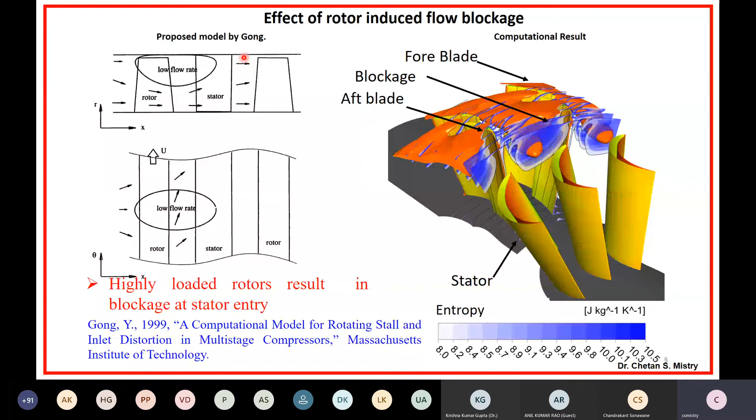Now the question is, this flow is entering inside my stator. When it is moving towards the stator, it lets my stator work under off-design condition, and that is not giving the expected pressure rise we are looking for. And in order to accommodate this loss, what we are having—if you look at—this is blockage loss, that loss we have reduced by using different 3D blading here.

So here if you look at, we are having lean here, dihedral we have done near this hub region, dihedral we have done near this tip region. And by doing so, what we are getting is my flow to be as per my requirement. But still what we have found, if you are talking in terms of exit flow angle...

When I'm doing my design for the stator, I say whatever flow that's coming out from my rotor will be striking on my stator. That's possible when I'm having only one blade. Here in this case, these blades are under tandem configuration, so I'll be having two wakes coming out from my rotor. So two wakes will be striking on my stator.

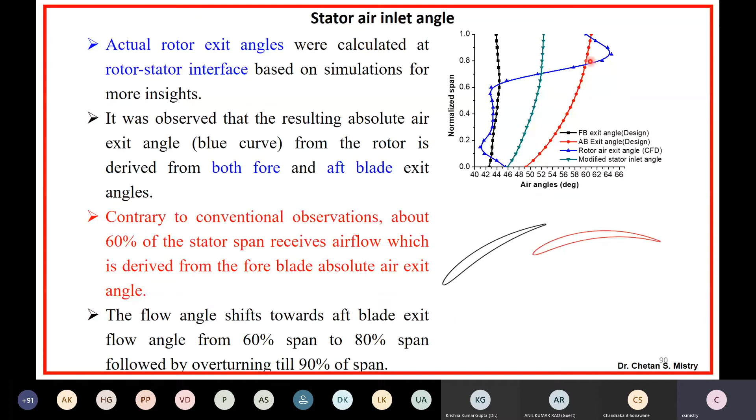So if you look at, this is coming out from my front blade, this is coming out from my rear blade. And this is what we have captured using the physics. What it says is, for a particular region, this is working fine; other than that, it is not working fine. And that's a problem for us. Why is it a problem?

You just understand the flow, that's what is coming out from my rotor, it is striking on my stator, and that's what is changing my physics.

So in order to analyze, we have modified our angle. We have taken the average angle here. When we are taking this average angle, just have a look at, this is what was my first case. I was having very great separation, that's what is happening on my suction surface. So you can see, this is the conventional part.

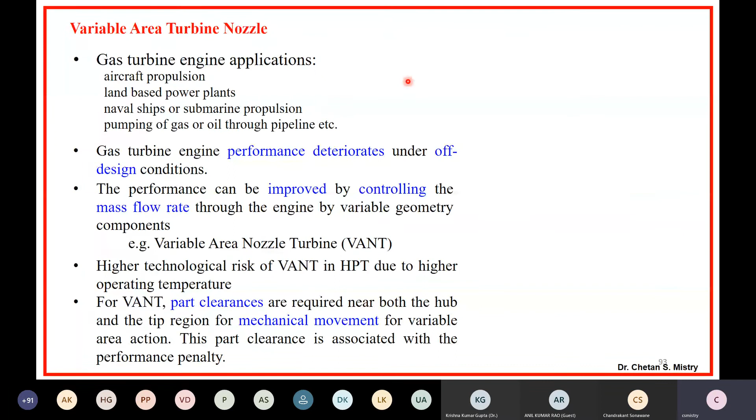So based on this, now we are having rotor and stator under fabrication, and very soon we will be doing the experimentation. That's a unique facility available in India at this moment, after Germany. Germans, they have done this work in the 90s, and then they stopped working on that. Now we have taken that as a challenge as per the requirement.

Next work, that's what is going on with my second PhD student. He is working on variable area turbine nozzle. If you recall, I was talking about the 6th generation aircraft in which it is a smart engine. What do you mean by smart engine? When my engine is working under design condition, each of my components is working fine.

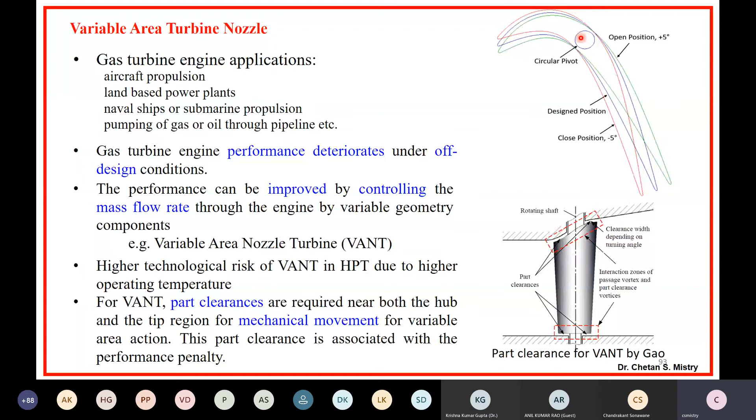So that's what we are doing. Here, if you look at, this is a pivot end, and I'm making this as a variable area. Let me show you here, so this is the data. As I told, nobody will share any details about any engine, any component, so it's a challenging part when you start doing the research.

We got one of the reports, that's the NASA E3 engine. As I told, GE and Pratt & Whitney, they have given separate ideas. So this is the engine data available for Pratt & Whitney, and we have selected this one for our analysis. For that analysis, we have all profile data near the hub, near the shroud, and in between. Based on that, we have developed this profile. You know, like leading edge and trailing edge for compressor or turbine, it is always very challenging, and that's the reason why people will not share any data about the shape of leading edge or trailing edge. So with number of trials and errors, we got this profile.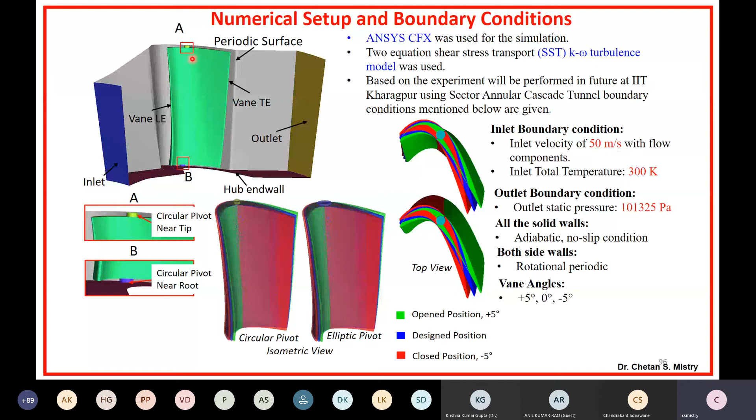Let me move to the next slide. If you are looking at, this is what is without pivot condition, you can say these are the streamlines, that's what is coming from pressure side to the suction side here. Same way, this is what is near the hub region, and this is what is near the tip region. Having this roll up, that's what is happening at this particular location. Here in this case, my roll up, it is happening at 70%.

Now what I am using, I'll be using say pivot point, that's what is say here I'm using circular one. Just look at how the physics it is changing. What it says, because you know, part of this upstream that will be merging in downward direction here. So my flow is trying to move more towards my suction side. Similar situation is happening here.

Now, when I'll be using say my elliptical end, you can understand what is happening. It will be having no upstream merging, that's what is happening, and I'll be having these streamlines, that's what is moving away from my surface. And this roll up, that's what is happening at 84%, and this is what is happening at 80%.

Just try to understand what we are analyzing here. In this case, if we are talking say 70% chord, at the exit I'll be having very large secondary flow, that's what will be coming out. When I say it is placed at say 84% of axial chord, you can understand the wake, that's what will be coming out, or secondary flow, that's what will be coming out, that will be of small volume.

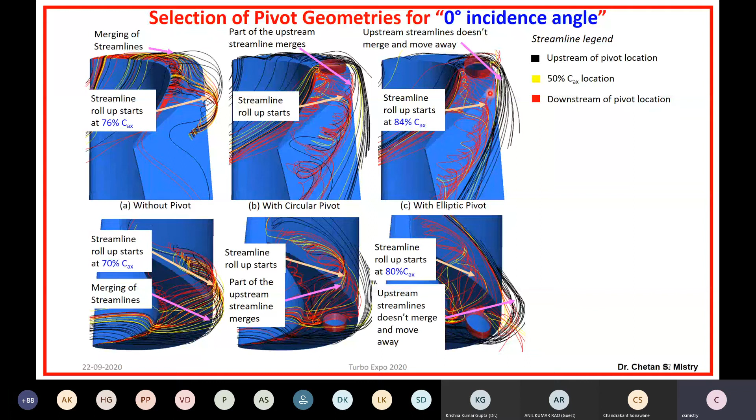Now the question is like, what will happen if I want to minimize the losses? This is what is happening. So this is what is one work, and this experimental setup, that's what is under development, and we will be doing the experimentation for that. Now this is what is one of the student projects. I have 25 students, they are working on this student project.

The whole purpose here is to develop, say, your flying car, and that too, it's an electrical flying car. At this moment we are talking for say 10 kg weight, and these are the fans what we'll be using in terms of say electrical propulsion. So you can say this is what is when I want to have lift up, so all my fans that will be facing like this, and exhaust that will be striking on the ground. When I want to move in the cruise condition, I will be tilting my fan in this position.

So the task is like, at what distance I need to put these fans and how many fans I need to use. Our study says if I'll be using say a single fan, then I'll be having more weight, I'll be having more power consumption. And if I'll be using multiple fans, I'll be having say less power consumption and less weight also. But the question was where to put these fans. So this is what was done by CFD analysis.

Okay, so we found there is a certain distance between these two ducts we need to put. This is based on the analysis using the rotor and whole engine analysis. This counter-rotating part has its own benefit in terms of increasing or decreasing the pressure rise. You can see when both rotors are rotating at low speed, at design speed, I'll be having low pressure rise. If rotating at high speed, I'll be having a different case. So this is one work.

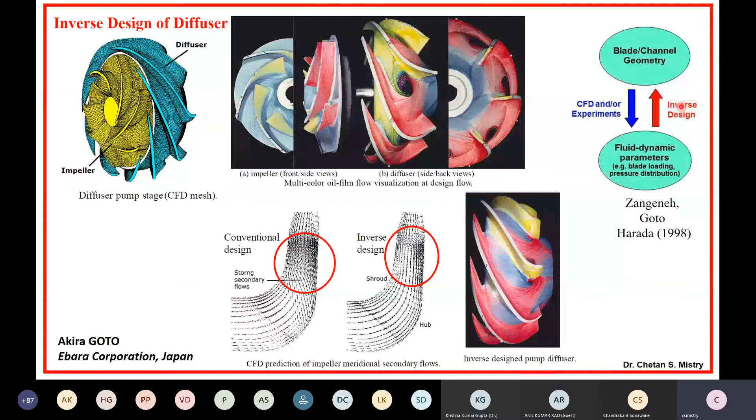Now there are certain bio-inspired turbomachines also. If you look at this, it's a mixed flow compressor kind of thing. They got inspired by this serration surface that was on a whale. Based on that, they have modified the suction surface profile on the blade. What you can see here is higher turbulence kinetic energy. By providing this kind of configuration, they are able to break down those vortices, and by means of that, they are able to reduce the noise. So noise is also one of the criteria for the design.

This is inspired by whale flippers, who made a new kind of impeller called the tubercle impeller. If you look at this ship propeller, the purpose is to increase the thrust value. What they have done is add serration on the leading edge. Similarly, this is what they have implemented in the case of an aircraft propeller. They modified the leading edge of the aircraft propeller, and by that means they increased the thrust.

Now this is a work by University of Cincinnati. They got inspired by this eagle winglet. What they are proposing is they modified the end of this tip. What we know is, if you are able to manage the tip leakage flow, you are able to increase your performance, or what we say in terms of operating range, or in terms of efficiency.

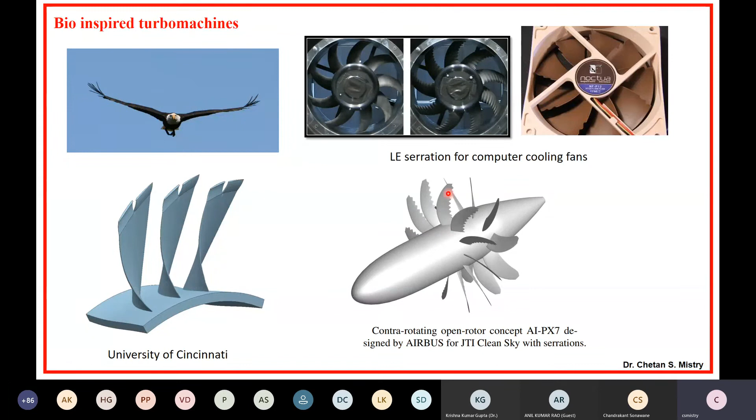So you need to understand, once you have this CFD tool, you can do a number of iterations. Once you get confidence in terms of the accuracy of the results, you can do iteration. Based on these iterations, you can develop your prototype, develop your model, and then do testing to see if it meets the requirement. So basically, people call the CFD tool a design tool, but it is not a design tool, it is a design iteration tool. You need to revalidate, you need to reconfirm, like that.

Now if you are looking at, these are some of the works going on in terms of casing treatment. You can understand here, this is a fan, a big fan, and here you are having casing treatment. For this casing treatment, there are different suggestions by different researchers.

So if you want to implement that for your case, let me share with you. All these compressors, all these turbines that you are looking at for a particular engine, that's unique for that engine only. It's not like a two-wheeler, say if my carburetor for Hero Honda is not working, I can replace it with one from some other vehicle. It's not like that. It is indigenously developed for an individual engine and for an individual component.

And that's the reason why the costing for that component is very high. When we say very high, a single engine may cost 200 crores, 300 crores, and even then they are selling at a loss. Maybe someday we will discuss all these things, but this is how you can reduce your iterations. Based on your results, you develop and test your facility, and with that testing you can go ahead with confidence.

Next, one more thing is in terms of inflow distortion. As I told you, when you are having takeoff, some of the flow will be going to the upper side, and it may be possible you will not be having flow on the downside, and that acts like an inflow distortion. Maybe when you have a wake coming out from the front of the aircraft, you will have a condition with turbulence. All this is subjected to inflow distortion.

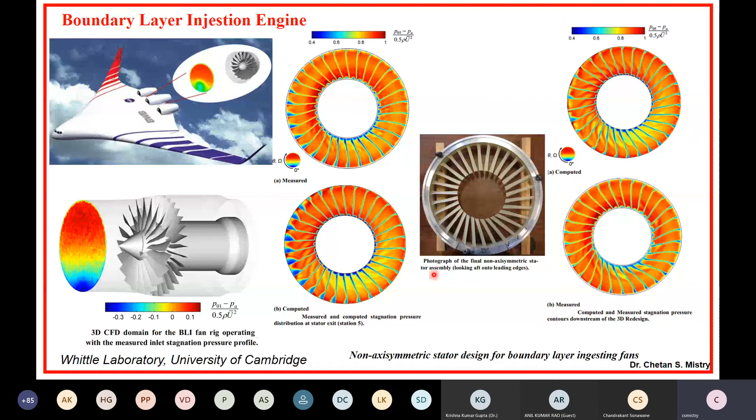Based on this study, they have modified the stator. Just look at the stator, there is a particular region of the stator that they have modified in terms of design. With this modification, if you look at, they are able to manage the flow at the exit of their stator, so this is a more uniform flow coming out at the exit of my stator. So you can understand the inflow that's flowing inside this fan is subjected to problems. Now that's transferred to the stator, and downside I'll be having another engine that's subjected to distortion again. To avoid that kind of situation, this is the new technology people are working on.

Next problem is with turbomachinery noise. You can understand, I'll be having upstream distortion, tip leakage vortices, growth of boundary layer, and wakes coming out. So all this together gives large noise. If you look at here, this represents the noise generated by the fan. So now as per the guidelines, very soon these airlines will be restricted from using certain kinds of engines which are making large noise.

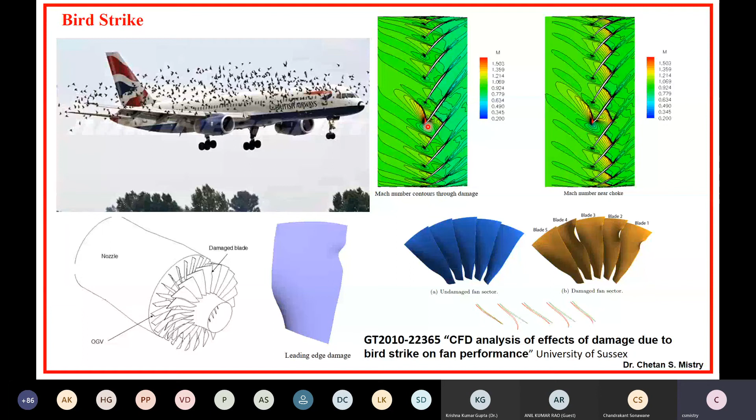Next challenge is bird strike. When a bird hits the aircraft, maybe one or two will go inside and damage the blade. You can see here the undamaged sector and the damaged sector. Now people expect CFD analysis to answer: if my blade is getting damaged, what will be the effect downstream? Look at this damaged blade configuration - because the blade shape has changed, that changes the physics here, so you need to be careful.

Next challenge is blade cooling. Here is my blade, and in the internal structure there are small holes. The challenge is to do meshing - these holes are maybe 0.4mm or 1mm diameter, and there are many of them with internal passages. This is very complex physics happening within the passage and even outside, which is the challenge for CFD.

There is a cooling mechanism - high pressure air taken from the high pressure compressor gets injected into the blade and comes out from these holes. You need to design this kind of passage, which requires very good understanding of flow physics.

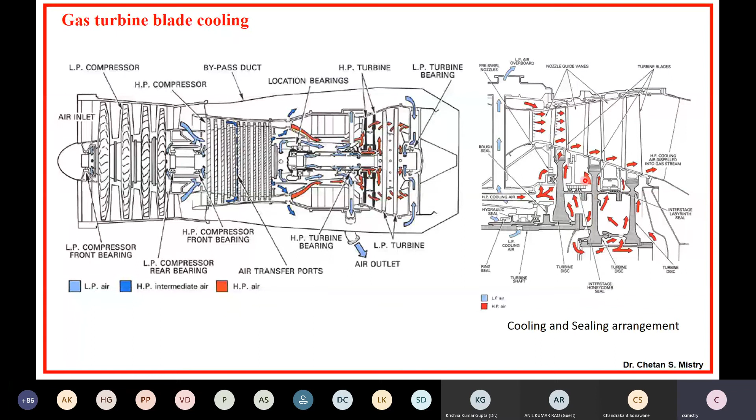There are engineers who only design these secondary ducts, called secondary flow analysis. Here you have seals and reams present, and the high pressure air goes inside - you need to be careful that the hot gas doesn't enter this passage because of the temperature difference.

There is one more realistic problem - let me show this. This is ice ingesting inside the engine. This is a real situation happening these days, mainly in the European Union and Western regions.

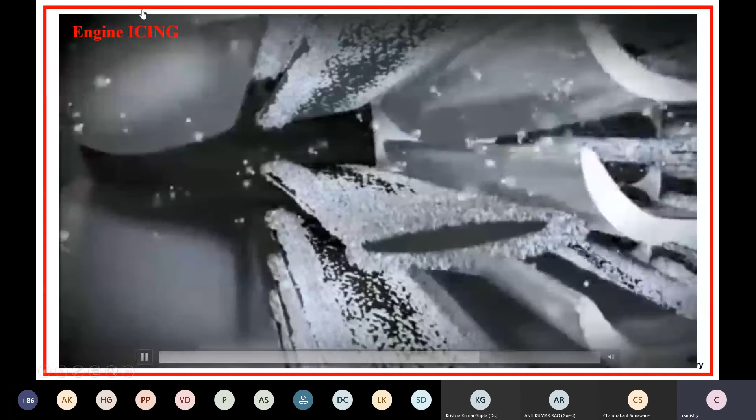Look at what is happening - this small ice particle passes through the rotor but gets stuck on that stationary surface. Some portion will get peeled off and enters the later stage. This is the blowdown of the engine, and that is a failure of the engine. This is also one of the challenges to analyze this kind of situation.

Next challenge is volcanic ash. You know flights will have volcanic ash particles flying that may go inside your engine. Here you can see what happens with the turbine nozzle. Now you need to analyze your engine under this condition.

Suppose this has happened - what will happen next to the engine? Over time the surface will get ruffled, so irregularity will come. When surface irregularity comes, the whole growth of the boundary layer creates trouble - all this becomes a challenge.

Now the next big challenge is to analyze the whole engine. This was the fullest project - it is LES, as I was saying. They have done full engine analysis using LES. This is the kind of work people now expect from CFD, which gives clear understanding of what exactly is happening. Now let's move towards other applications.

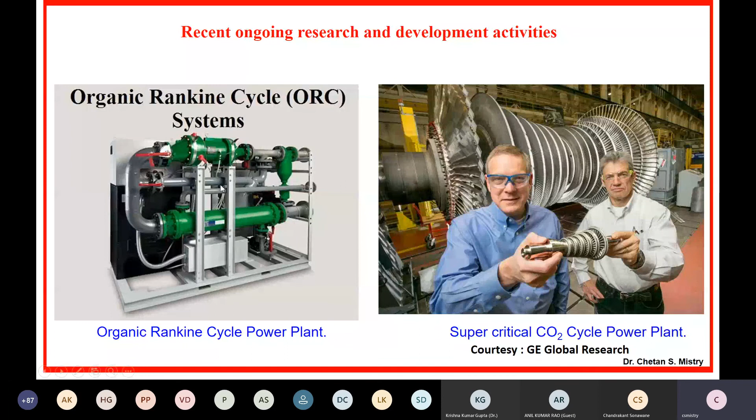Then people started talking in terms of counter-rotating technology. They have various applications, say fan, turbine, pumps, tidal pumps, and this kind of engines.

Now overall, let's try to come to the concluding part. What are the advantages of CFD in turbomachine application? This is extensively used for design and analysis purposes. The accuracy of CFD is swiftly rising. The accessible computational resources permit simulation for high-speed flow, which requires high fidelity methodologies.

To control unwanted features like strong secondary flow in turbines or corner separation in compressors, CFD has the ability to predict this kind of three-dimensional nature. Modern turbomachinery design is almost completely relying on CFD.

Companies now are more relying on analyzing the physics by using this CFD tool. We can predict changes in the direction of flow with more reliability, and also flow three-dimensionality.

Using CFD study, the distortion can save time and cost, and during the early stage of design we can process for the compressor. Let me share here: suppose you already have idea about what's happening with your distortion. If those results are available with you, you can do your iteration for design in which you can make distortion tolerant fans or distortion tolerant compressors.

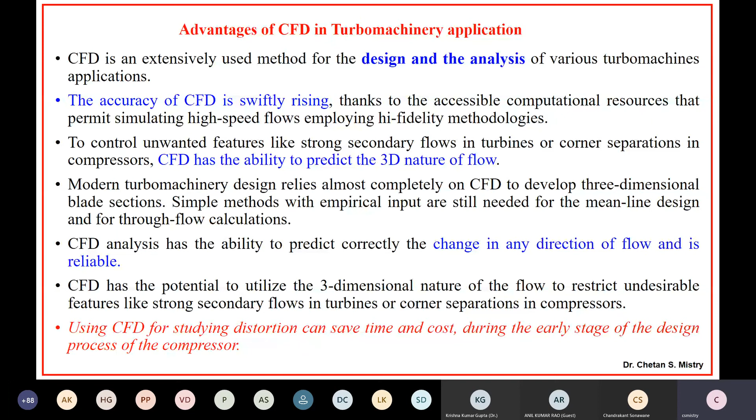That's what Cambridge University is working on. What are the issues? Three-dimensional CFD calculation in compressor blades is still not accurate enough to calculate the total pressure loss.

The physics is not clearly being captured because you're having all kinds of flow happening. CFD cannot accurately estimate the loss prediction, and understanding its result needs great skill and experience. You need to be very thorough with the subject, and then only you jump into this turbomachinery part.

Numerical error is commonly obtained by utilizing CFD due to finite difference approximation. So if I'm using steady state analysis, using RANS, that RANS has its own limitations.

Error is involved during the modeling where the true physics is not well known, and it's complex to model, like turbulence modeling. The geometry you will be using needs to be clearly known to you, clearly understood.

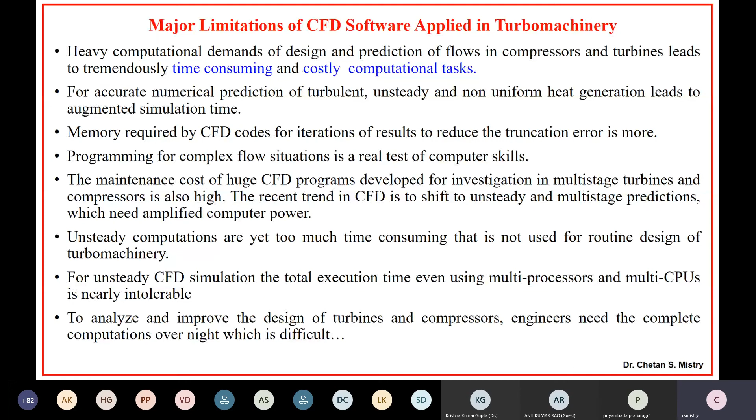So now, what are we looking for in next generation CFD software? Total flexibility with regard to complex geometry, so meshing needs to be very easy. We need to reduce the grid generation task required from the user, possibly by using automatic grid generators or adaptive solvers.

Highly accurate, robust, efficient solvers are required, with second order accuracy and very fast convergence rate for steady as well as unsteady rotor-stator interaction. Overall, it should have robustness and reliability, be adopted for large scale computing facilities, and be rigorously validated with physical models of turbulence, combustion, multiphase flow, including their range and validity.

It should allow for multidisciplinary applications, like conjugate heat transfer, aeroelasticity, and aeroacoustics. You need to understand what CFD analysis we are doing. Maybe Professor Sonawane will discuss this in more detail when he discusses fluid structure interaction.

So you know what results you get from this CFD analysis, in terms of pressure distribution. I can consider that as a force and put it into my FEM analysis as a force. I can do aeroelasticity analysis also, and that's what companies are doing.

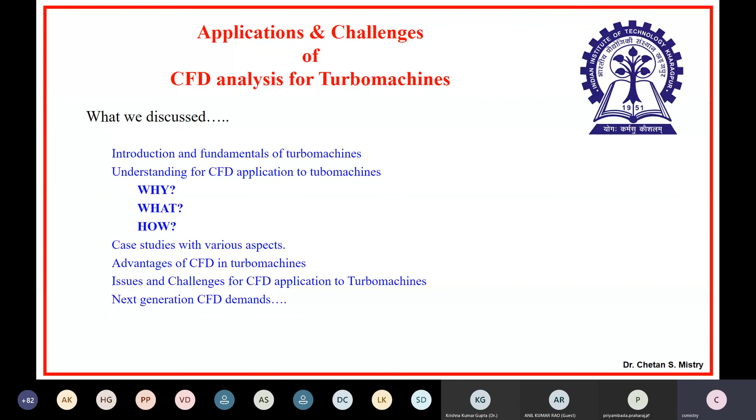So if you look at what we discussed today, I think I am able to convey the message in terms of the applications and challenges of CFD analysis, particularly for turbomachinery. I started with the introduction and fundamentals, then discussed the questions of why, what and how, followed by certain case studies, the advantages of CFD, the issues and challenges, and next generation CFD demands.

As I told you, necessity is the mother of this invention. If you look at the applications of these turbomachines for aero engines or land-based power plants, we are having so many research activities going on.